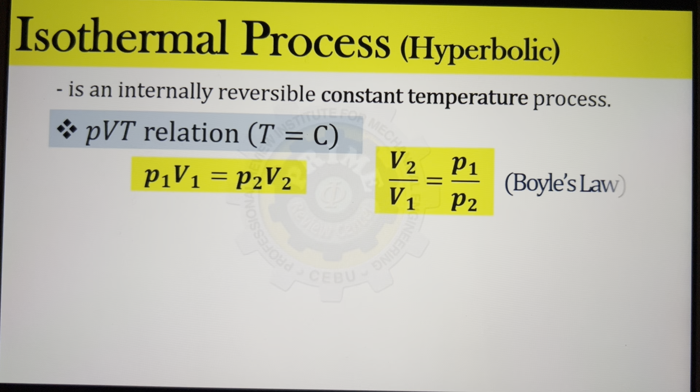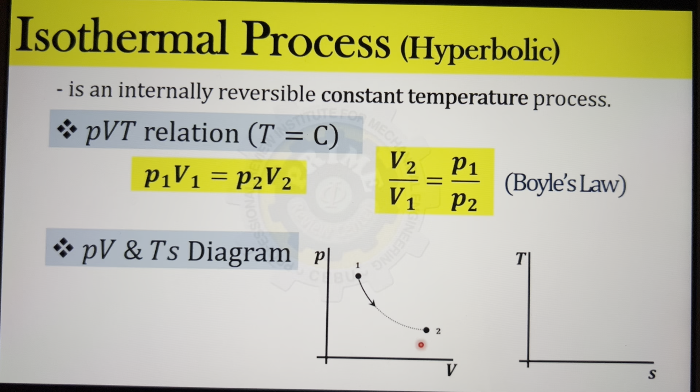Then, ang PV diagram naman natin, and TS diagram, ito yung itsura. Sa PV diagram, kapag kinonsider natin pababa yan, let's say nag-expand, paano mo nasabi expand? Kasi ito yung point 1 to point 2, lumayo. So, expansion yan. So, yan yung constant temperature. Then, syempre sa TS diagram, kitang-kita ang constant temperature kasi nga meron kang temperature axis.

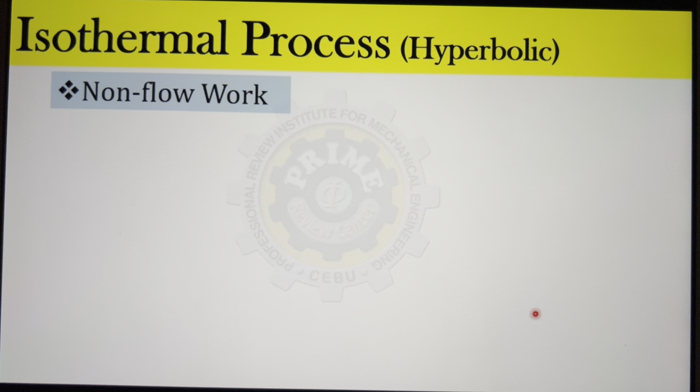The next formula, work non-flow. Doon pa rin tayo magsimula: integral of PdV. So, at constant temperature, pwede natin sabihin pressure is constant over volume. So, hindi na natin isa-isahin yung integration. Basta yun yung pwede natin gawin. So, we will arrive to work non-flow. That would be P1V1 ln V2 over V1.

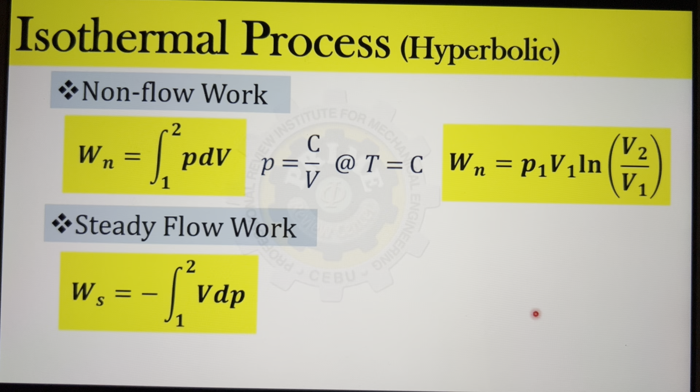Then, for steady flow, ito yung general formula pa rin. By this time, volume naman yung papalitan natin. Constant over pressure at constant temperature yan. Then, we will arrive to the work ng steady flow: P1V1 ln P1 over P2. Okay? Hindi 2 over 1, ha? Kasi may negative sign nga tayo. So, pag may negative sa ln, pabaliktad ang numerator at denominator.

And mapapansin natin, itong dalawa is parehas P1V1 ln. Iba lang yung nasa loob ng logarithm. V2 over V1 is the same with P1 over P2, sabi sa Boyle's law. So, pwede natin sabihin, ang isothermal work non-flow at ang work steady flow ay parehas. Kaya pag tinanong sa problem ang work, kahit alin sa dalawa gamitin natin, parehas lang.

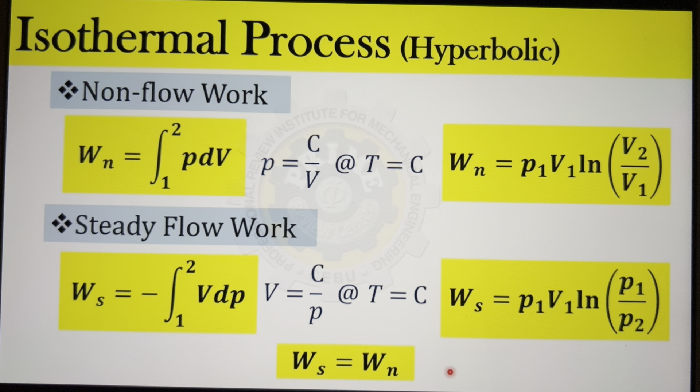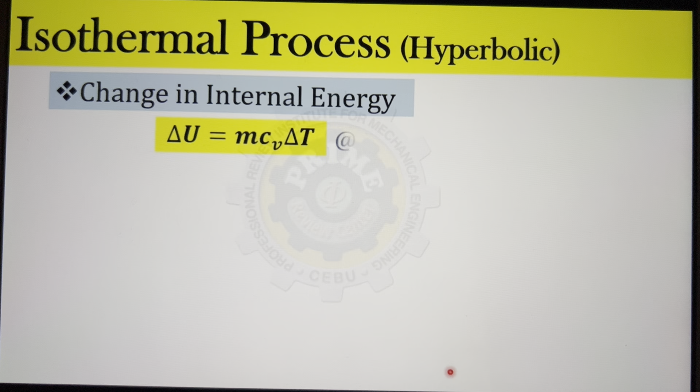Change in internal energy, since fixed yung formula natin dito, kasi nga constant ang ating temperature, ang change in internal energy natin ay 0 na ngayon. Ang change in enthalpy natin, ganun din. Dahil fixed yan, we know that change in temperature at constant temperature is 0, so lalabas ang change in enthalpy na 0 din.

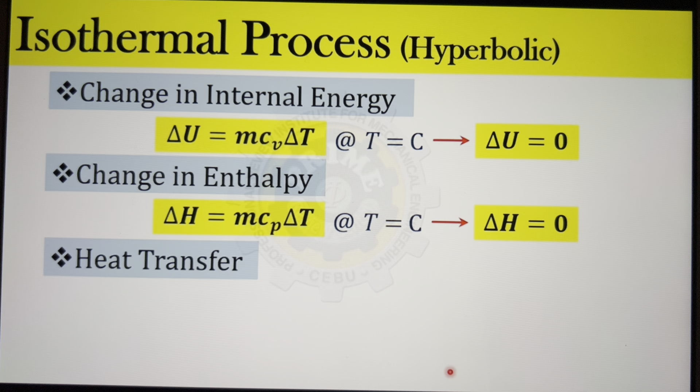Okay, so ang heat transfer ngayon natin. By the way, ang heat transfer, pwede rin natin gamitan ng formula ng first law, na-discuss natin sa term 1. Since ang change in internal energy at change in enthalpy ay parehong 0, magka-cancel yan sa first law equation. Kaya lalabas, ang heat is the same with work non-flow and equal din sa work steady flow. And another way to compute for heat sa constant temperature is T delta S.

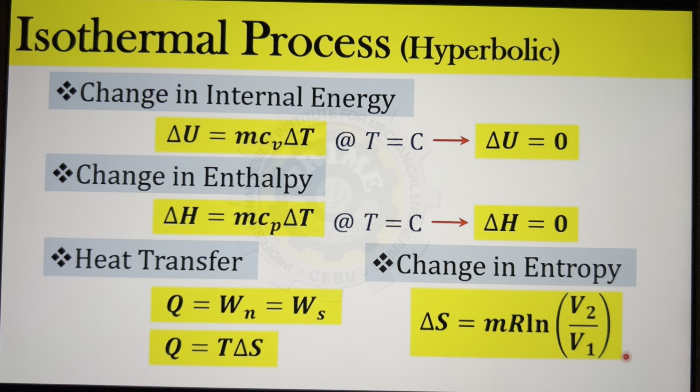So, punta tayo sa change in entropy. Hindi na pwede dito ang mc ln T2/T1. Wala naman tayong specific heat at constant temperature. Wala nun. At hindi mo rin pwede sabihin na ln ng T2 over T1 kasi nga parehas sila. So, pag ginawa mong ln of 1, magiging 0 yun. Kaya ang formula natin sa change in entropy would be mR, this time, ln of V2 over V1. Take note, volume 2 over volume 1, hindi pressure 2. Pero pwede mong palitan ng pressure, kaya lang magiging pressure 1 over pressure 2.

Problem: determine the theoretical horsepower required for the isothermal compression of 800 cubic feet per minute of air from 14.7 psia to 120 psia. Given, sinabi isothermal, so we have constant temperature. Then, we have volume flow rate kasi may per unit time, so we have 800 cubic feet per minute. Then, sinabi air. Pressure 1, 14.7; pressure 2, 120 psia. Ang required is the power in terms of horsepower.

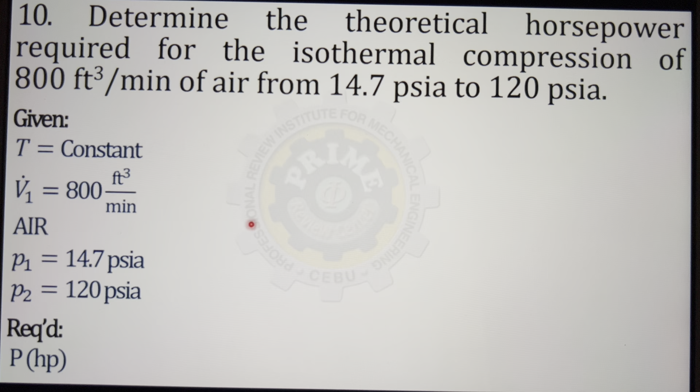Okay, sa mga formula natin, wala tayong binanggit tungkol sa power. Kaya lang, alam natin ang power is energy per unit time. And ang energy naman natin dito sa mga formula ay internal energy, enthalpy, heat, and work. Kaya lang yung power natin, syempre yung produced. Saan ba tayo kumukuha ng produced? Dun yun sa work natin. So, ang energy is the work. And we know that work is P1V1 ln of P1 over P2 sa constant temperature.

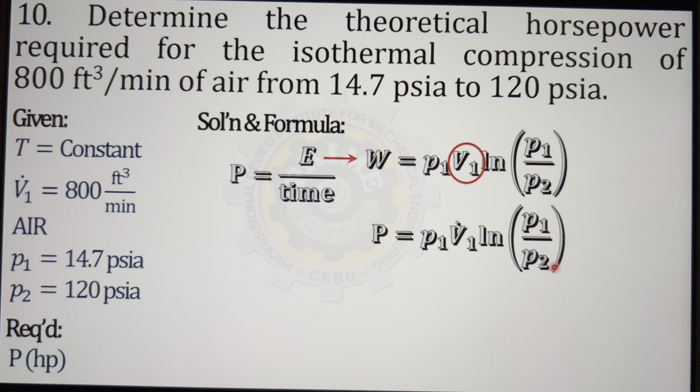Okay, so substitute lang natin yung mga given. Then, cancel natin ang inch square. Cancel ang feet square. So, may iwan na feet na isa. Cancel yung PSIA. Okay, so kaya lang ang gusto nating unit is horsepower. So, we have the conversion.

1 horsepower is 33,000 foot-pound per minute. So, magka-cancel ang minute, magka-cancel ang pounds, magka-cancel ang foot. So, we have negative 107.75 horsepower.

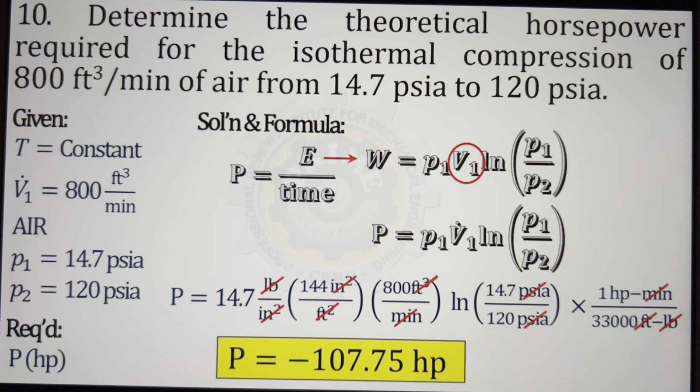Helium with R of 0.4968 BTU per pound mass Rankine is compressed isothermally from 14.7 psia and 68 degrees Fahrenheit. The compression ratio is 4. Calculate the work done by the gas.

So, helium, yung given natin, binigay na rin yung gas constant, 0.4968 BTU per pound Rankine. Sinabi, constant temperature yan. Pressure 1, 14.7 psia. Temperature 1, 68 degrees Fahrenheit. Okay, meron tayong compression ratio.

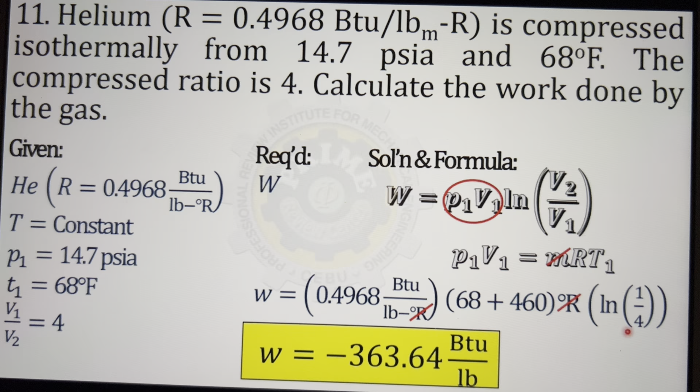Work done by a substance in reversible non-flow manner in accordance with volume equals 100 over the pressure, and the volume with the unit of cubic feet where pressure is in PSIA. Evaluate the work done on or by the substance as the pressure increases from 10 psia to 100 psia.

So, ang given natin is pressure 1, 10 PSIA. Pressure 2 is 100 PSIA. And binigay sa problem, tatawagin natin itong condition, ang volume is 100 over the pressure. Pag inayos natin yan, that would be pressure volume equals 100. Ano ba yung 100? Constant number. So, pwede na sabihin, PV is equal to constant. That is the same with temperature is constant.

Kaya kung hinahanap ang work, ang formula ng work natin is at constant temperature. Kaya P1 V1, this time ln of P1 over P2, kasi may given tayong dalawang pressure. So sa formula natin, ang volume 1, kukunin natin doon sa condition: 100 over pressure 1.

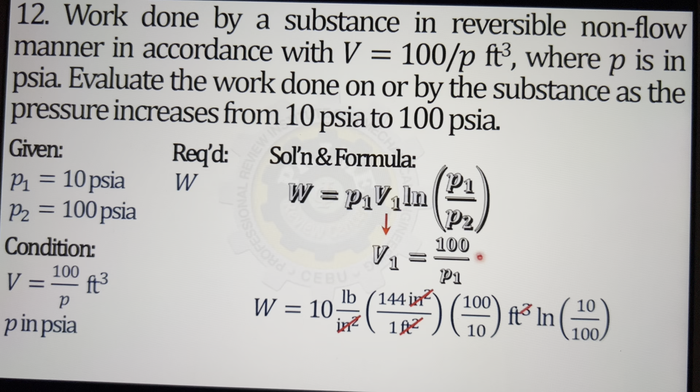So, pwede na natin substitute agad. We have work by 10 PSIA. Then, yung conversion, 144. Then, volume 1 is 100 over pressure 1. Ang pressure 1 is 10. Then, ln of P1 over P2. So, cancel ang inch square, cancel ang feet square, cancel yung feet square dyan. May iwan yung feet. So, ang unit na natin is foot-pound. So, we have the work, negative 33,157.22 foot-pound force.